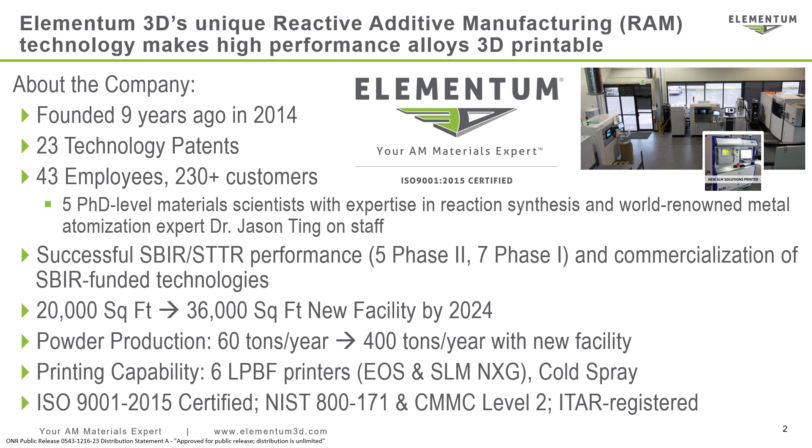The Navy challenge for this project is to rapidly develop high temperature and corrosion resistant 3D printable nickel superalloy materials. But why does the Navy need to 3D print metal parts? The Navy has a huge challenge in maintaining critical military equipment to ensure fleet readiness. Being able to readily source and ship spare parts for vessels and equipment is essential. Additive manufacturing can be leveraged to drastically shorten lead times for supplying parts for legacy equipment.

To be able to print useful spares, the materials available to the process need to meet the high demands of the application. Nickel superalloys are needed for hot and corrosive environments because they have good high temperature mechanical performance and oxidation resistance. 3D printing of spares for high temperature systems has been very limited because many nickel superalloys cannot be successfully processed into crack-free parts. The sooner we can develop printable materials suitable for demanding naval applications, the better the Navy can maintain readiness by 3D printing high-quality, functional spares.

The aim of this project is to use modeling tools to accelerate the development of 3D printable nickel superalloy materials. The expected transition targets are components and structures in gas turbine, marine exhaust, and high-velocity missile systems. The requirements of this program are to develop the solidification model for formulation prediction, identify candidate formulations, and then validate printability and material properties experimentally.

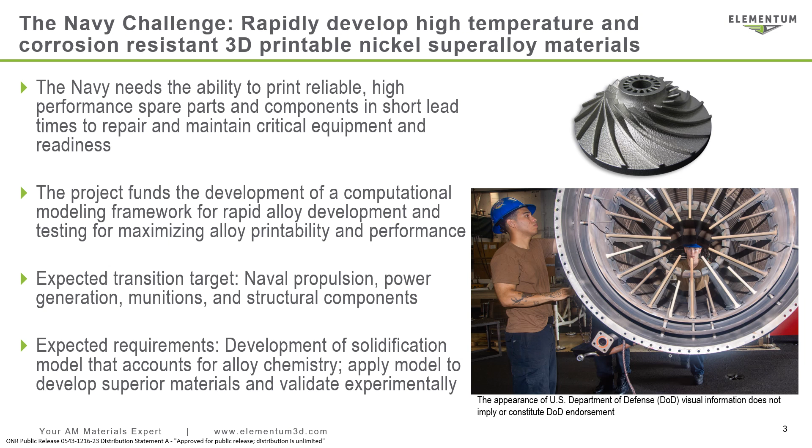The operational use of the high-temperature resistant alloys being developed through our modeling and validation strategy will first be for maintaining and improving legacy equipment. Then, the goal is to enable new, more powerful and efficient propulsion and energy generation systems along with weapons platforms.

These applications are not unique to the Navy, and the materials developed using this approach have actually attracted quite a bit of interest from the Air Force and from gas turbine commercial energy production systems. Ultimately, we see passenger jet engines also benefiting from the enhanced range of printable nickel superalloy materials for heat shields, fuel injectors, and eventually turbine blades themselves.

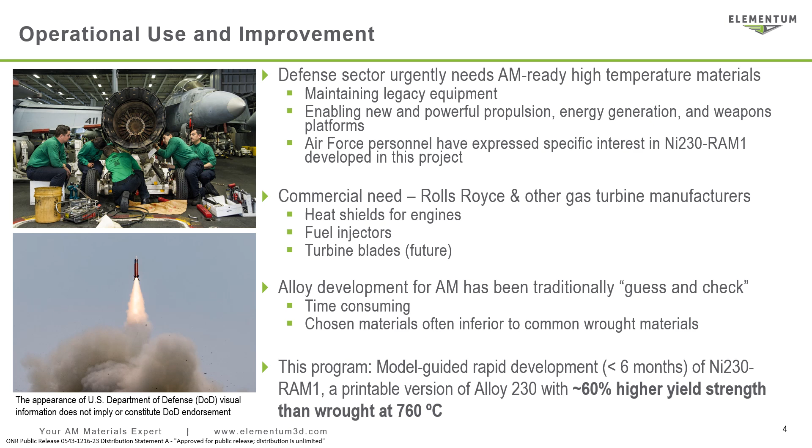We were able to predict and fix the cracking problem by investigating the solidification behavior of these nickel alloys. Most cracking in metal 3D printing has to do with what happens when the molten metal cools. Solidification models give us an idea, based on the composition and cooling conditions, of which formulations favor a grain structure that avoids cracking.

On the left, we have a RAM-free printed alloy 230 showing fairly large vertically oriented columnar grains in this colorful grain map that you see. Underneath that, we see cracking in the microscope image. When RAM is added, the cracking is eliminated, and the grain map on the right shows the smaller, rounder grains that are randomly oriented. The table below illustrates the consequences of the RAM additions at the macroscale.

The cracked printed alloy 230 without RAM actually has higher yield strengths at temperature than the wrought plate. But you can see that the elongation and the ultimate tensile strength are drastically reduced because of the cracking that has caused brittleness. With RAM, we have high yield strength, and we maintain the high ultimate tensile strength, and since the cracking is absent, we have even recovered most of the elongation capacity of the alloy. So it's clear that the RAM process completely changes the behavior of this material when printed, and modeling helped quickly identify the combination of RAM composition, the concentration, and the particle size ranges to test.

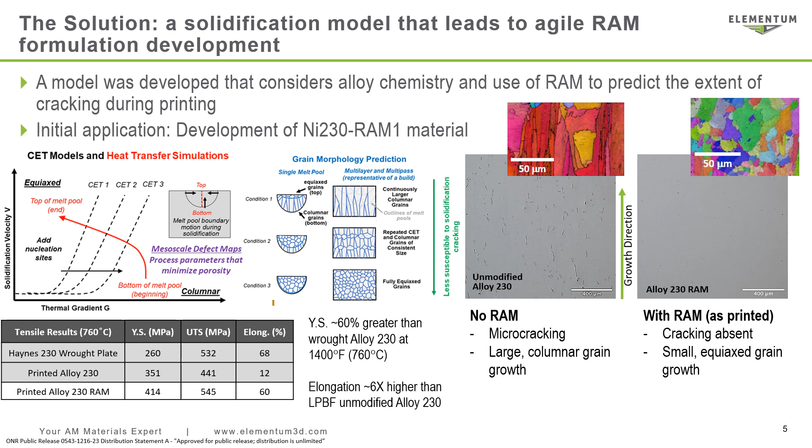We are currently in the second year of a Phase 2 base effort, and the Nickel 230 RAM1 has already been approved for initial commercial release at a TRL level of about 4 to 5. We've also started to apply the modeling approach to gamma prime containing nickel superalloys.

These are some of the best nickel superalloys in terms of high temperature strength and resistance to creep. Creep is the resistance to deformation over long periods of time and high stresses at temperature. These alloys are used to make turbine blades because of these properties.

It's something of a holy grail to be able to print turbine blades directly because traditional casting processes are very time-consuming, laborious, expensive, and have very low yields. Ultimately, the printing of these components will also allow for design improvements that dramatically improve the performance over castings.

We have already seen some success in reducing or even eliminating the cracking in Inconel 738 and Rene 80, both of which are even more crack prone without the RAM additions than alloy 230. The table at the bottom shows the milestones and timeline for that Phase 2 work. We have already achieved the first 3 milestones, and we are working to refine the Inconel 738 and the Rene 80 formulations for the initial commercial release.

By the end of Phase 2, we will generate full specimen and component level test data and performance ratings with the help of an industrial partner. And we are gathering feedback on the performance of the printed materials that we supply to them for testing. We are looking to get into the Navy's Special Experimentation Cell to find and test applications for spare parts printed from our materials.

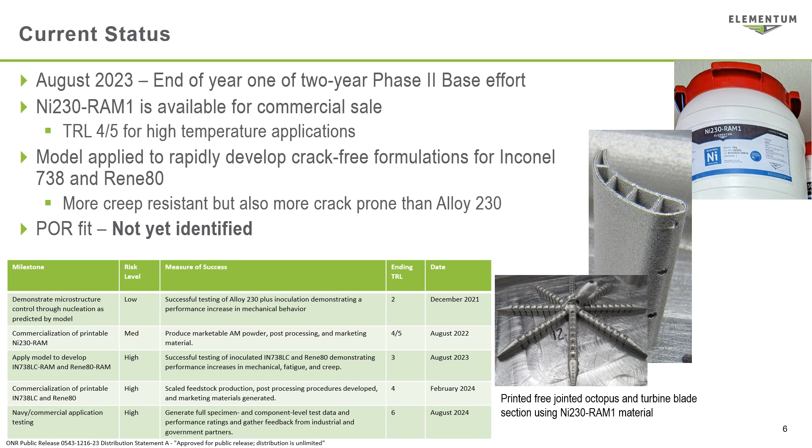This slide summarizes the key features, advantages, and benefits of our approach. It also outlines the advantages of the printed Nickel 230 RAM1 relative to the printed Haynes 230 alone and the wrought plate. With modeling, we estimate that we can reduce the cost and time needed for the RAM formulation development by 1.5 to 2 times.

For the Nickel 230 RAM1, experimental validation showed that the material has a 60% higher yield strength than the wrought alloy and a 6 times higher elongation at break than the unmodified Haynes 230 that was cracking. Importantly, we were able to increase the creep life by 7 times relative to the unmodified printed 230 alloy. This is comparable to the wrought creep performance.

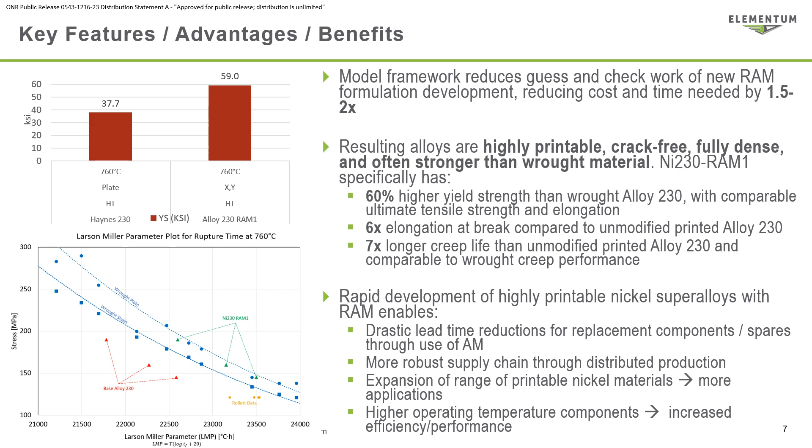Overall, we believe that the rapid development of easily printable nickel superalloys with the RAM additions has led to drastic lead time reductions for spare part delivery. A more robust supply chain is then useful for distributed production possibilities of additive manufacturing. The expansion of the range and capabilities of these nickel superalloys will open up new applications and increase the efficiency and performance across the board.

I think it's clear that we've developed a great material that we're very excited about, and we're working to develop a few more under this same program. But ultimately, we need help transitioning this technology to make it broadly useful for the Navy. What we need are application targets, CAD files for printing components, and assistance in identification of any appropriate programs of record. Along with that, we're looking to expand into further Phase 2 and Phase 3 funding pathways.

We already have buy-in from the Air Force Research Lab's Director of Additive Manufacturing. And in industry, we are already discussing the use of this alloy with Northrop Grumman and Rolls-Royce for high-velocity weaponry and gas turbine applications. We still need transition advocates and application targets within the Navy, however.

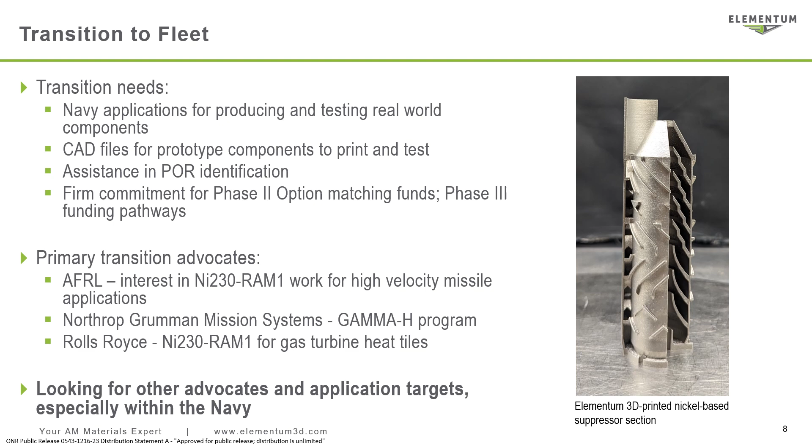We believe the materials we're developing will be suited to applications in both commercial and defense markets. We're targeting gas turbine components like heat shields and fuel injectors in the commercial aerospace and energy generation markets. Applications in the commercial marine propulsion exhaust and cooling systems would also benefit from these materials due to their resistance to heat, oxidation, and corrosion.

In defense, similar applications for gas turbines and marine systems are targets, but a major difference is the use of these materials in high-velocity missile systems that experience very high operating temperatures and oxidizing conditions. Elementum 3D's goal is to serve the commercial and defense markets however possible, just as we do with our aluminum alloys. We plan to accomplish this either through direct sales of our material to government sustainment facilities or working with contract manufacturers and large prime contractors as an integrator. From the start, our primary interest and objective has been to expand the printable materials library for additive manufacturing.

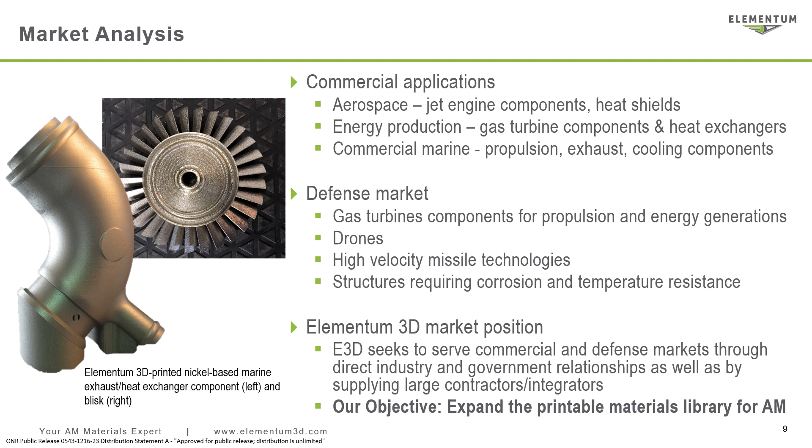Elementum 3D is an innovative small business focused on developing, manufacturing, and supplying production feedstocks for commercial and defense customers. We also do prototype scale printing to support our application development activities and assist with knowledge transfer to contract manufacturers or OEMs at scale production.

What we really need is to develop these defense markets further by really digging into the new materials for this program. To do that, we need Navy champions that can help us with the applications, CAD models, and testing requirements for increasing the TRL level beyond 4 or 5. As well, we also need inclusion in the right program of record so that we can really dig into things like specification development and full qualification, as we have with our other products.

I'll leave you with one somewhat boastful but true statement. Prime contractors cannot supply printable, high-temperature nickel superalloys that are capable of competing in the defense application market because they don't have the right materials for them. Our new materials will enable the replacement of legacy components with drop-in spares with equivalent and, in many cases, better properties than the original component, and still produced by those exact same prime contractors, just using our materials instead. Please help us make that a reality.